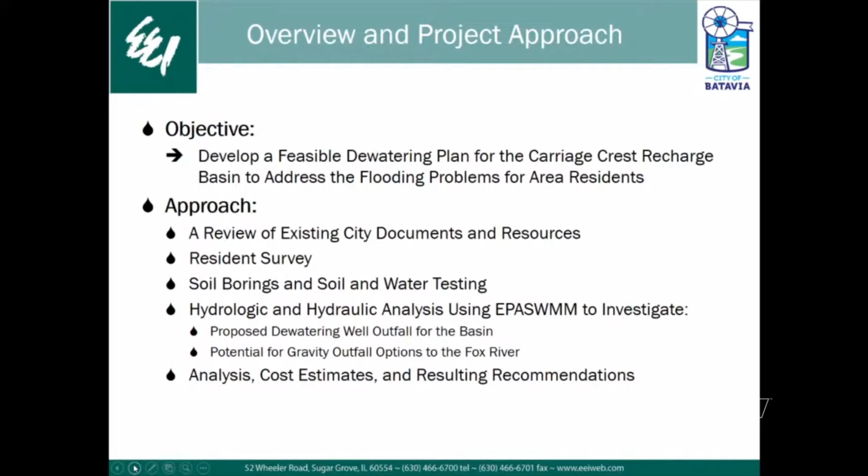So the objective of our study was to develop a feasible dewatering plan for the Carriage Crest recharge basin to address the flooding problems that the area residents are having. To do that, we reviewed existing city documents and resources. We conducted a resident survey, and we did some soil borings and did soil and water testing, and then hydraulic analysis, looking at a dewatering well outfall, and then a potential gravity outfall to the Fox River. And then we did some analysis, estimates, and recommendations.

This is a picture of the storm sewer tributary area to the basin. I'm sure you're all familiar with the area. I don't know if my pointer's quite strong enough, but the basin is in the center there, and the shaded area is the approximate storm sewer tributary area, about 66 acres. So all that storm sewer system collects the runoff during a storm event and takes it to that basin, for which there's no gravity outlet. It's just the inlet pipes.

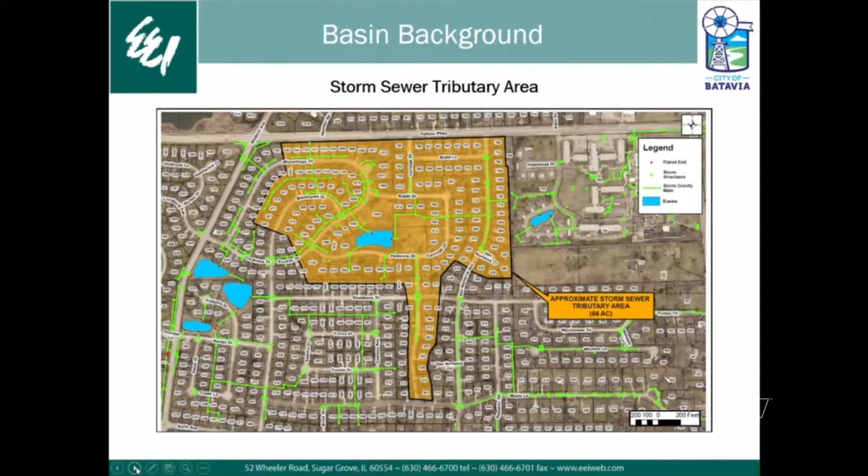A little background on the basin that we learned through the investigation and with the assistance of city staff. There's sand and gravel layers underlying the basin and also within the surrounding soils. The basin was constructed over a former dump site, and there was evidence that there was gravel mining prior to its use as a dump.

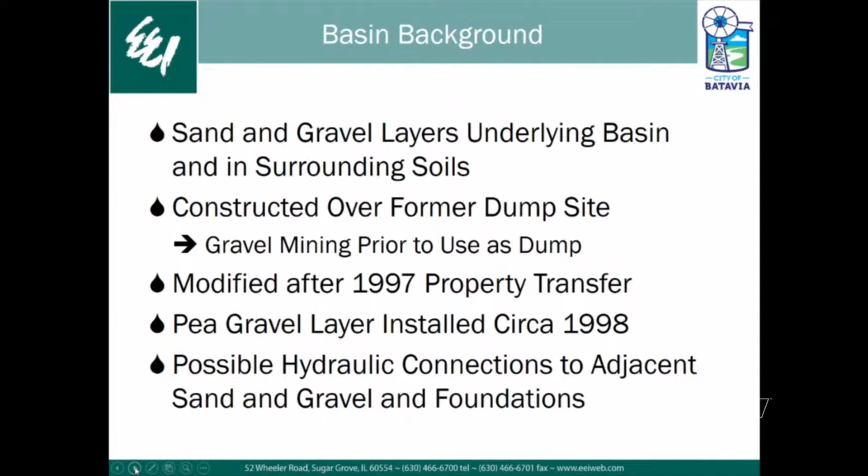The basin was modified after a property transfer in 1997, where an additional lot was added to the subdivision. Then around 1998, after the 1996 storm events, there was a recommendation to add a pea gravel layer just under the surface of the bottom of the basin to try to help promote infiltration. We've also learned there are possible hydraulic connections to the adjacent sand and gravel layers, and possibly also to foundations and basements.

This is a concept sketch of the basin, based on our survey and soil borings. You can see, on my right, the bottom of the basin at about elevation 704. There's a thin layer of topsoil, then that layer of pea gravel, and underneath that is the dump material, and below that is the gravel layer.

We took two borings, one in the bottom of the basin, and in that one there was water. Water in the boring about 2 feet deep, just under the pea gravel layer, which would indicate possible permeability issues with the material underneath the pea gravel, the dump material. In the other boring, just outside the basin where we're looking at a possible lift station location, there was a thinner layer of dump material and then sand and gravel, but there was no water in that boring. So there's a possibility of some perched water table in the basin area.

For reference, from the plans and survey information, there are a few adjacent homes to the basin, and what we think is the lowest basement floor elevation is about the same elevation as the bottom of the basin. So if there is some connection between the pea gravel and the sand and gravel layers, there could also be connection to some of the foundations.

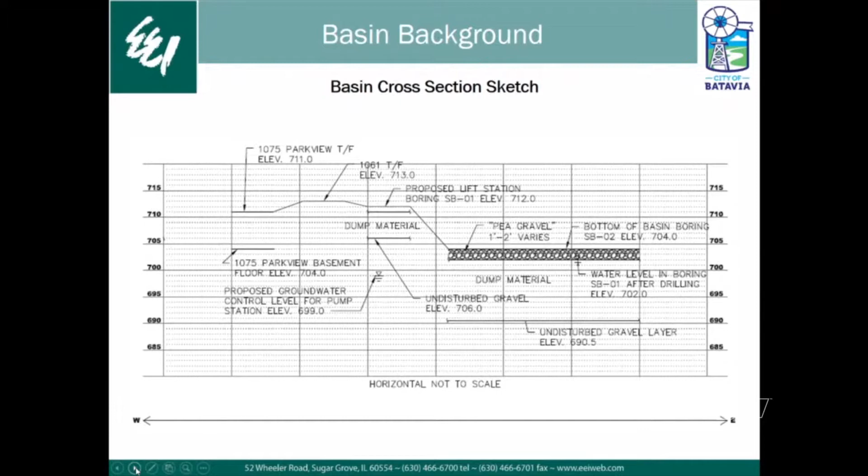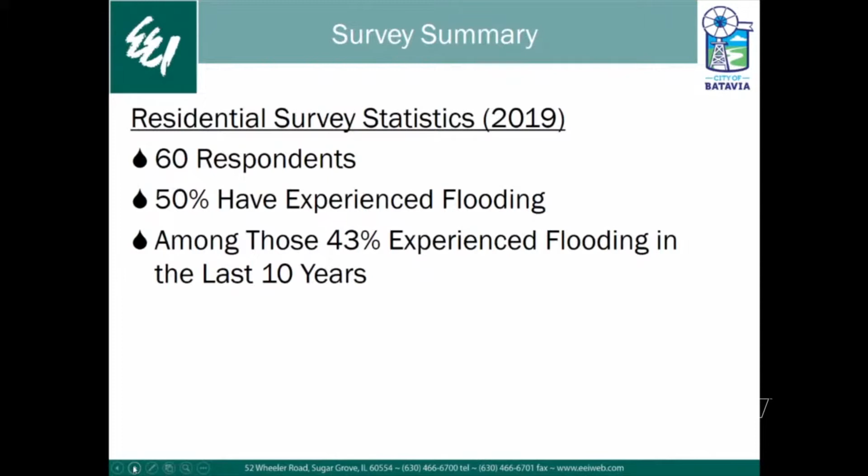The resident survey was done in the fall of 2019. We prepared that, and then city staff distributed it, collected the responses, and got them back to us. We had 60 respondents. About 50% said they had experienced flooding, and of that 50%, 43% said it was in the last 10 years.

This pie chart represents the last 10 years from the survey results. About three-quarters of the respondents had not had a flooding issue in the last 10 years, but just over 20% did, and 15% had flooding issues two or more times in the last 10 years.

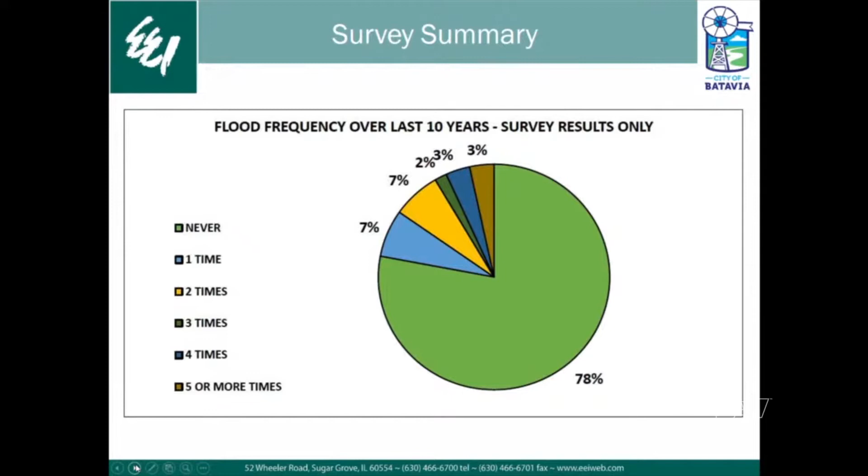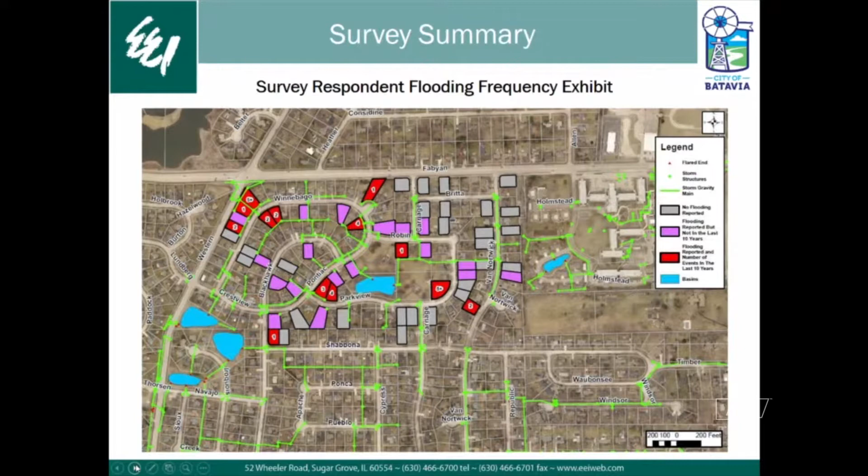This exhibit shows the respondents. All of the shaded lots responded to the survey. The gray shading reported no flooding. The pinkish shading reported flooding, but not in the last 10 years. The red shaded areas reported flooding in the last 10 years, with the number within the lot indicating how many times they reported flooding in those years.

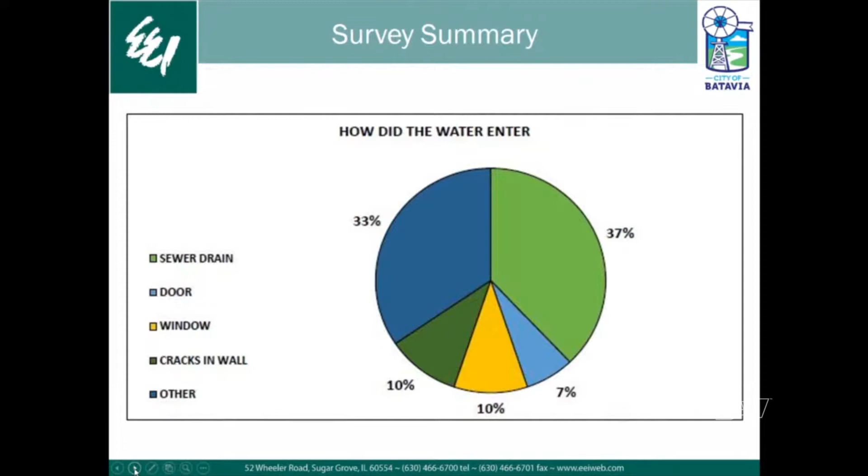Now I'd like to talk about the soil borings we did. We conducted two soil borings, one in the bottom of the basin, in the middle of the basin, and then one where we propose a good location for a lift station if we're pumping storm water.

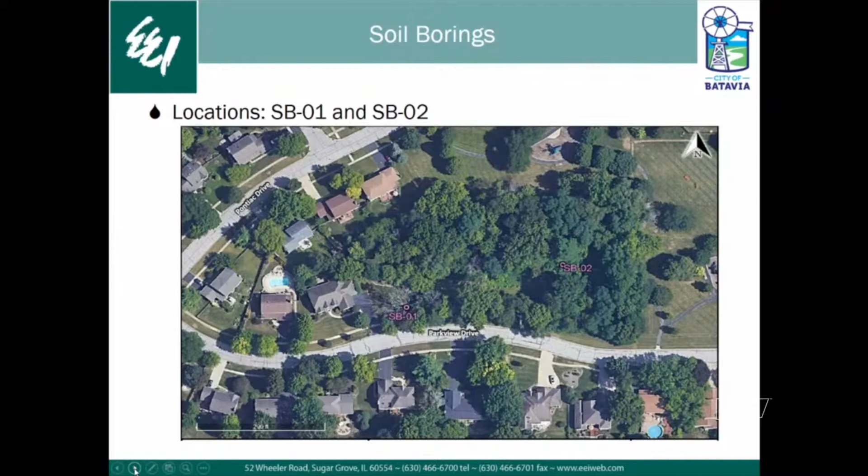The soil boring SB01 was outside of the basin, at the proposed lift station site. Underneath the topsoil, there was about 6 feet of dump material, and then sand and gravel material. The soils report calls that material suitable for a foundation to locate the lift station.

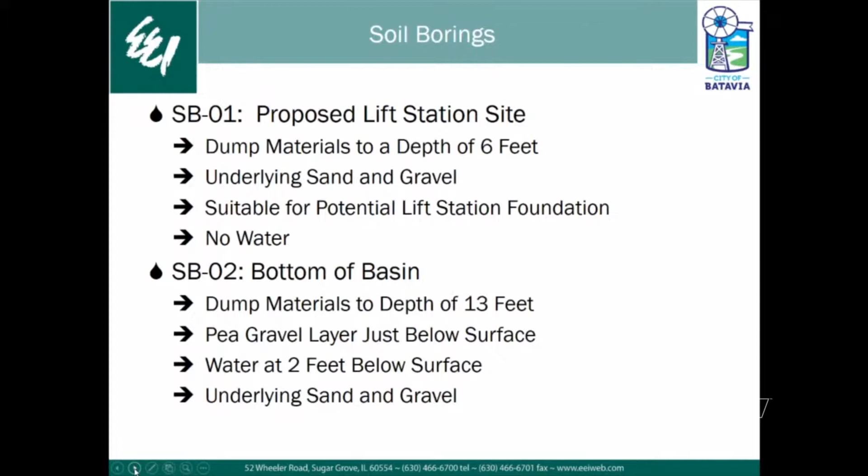There was no water in that boring. Then the second one, in the bottom of the basin, the dump materials there were at a depth of 13 feet, and that pea gravel layer was just below the surface. We had water at 2 feet below the surface in the boring hole, and underlying that was the sand and gravel layer again.

So a few things we gathered from the soil borings and testing: there's a varying thickness of the dump materials, and I think it filled in an excavation or an old ravine. In the middle, it's a much thicker layer, and as you go up the sides and outside of the basin, you have a thinner layer of dump material.

But there is sand and gravel below the entire site and surrounding area, it appears, and the soils there would be suitable if we wanted to construct a pump station. For groundwater issues, we found groundwater in the boring in the middle of the basin, which indicated the possibility of a perched water table within the former dump site.

There's unknown permeability of those soils, but given the fact that the water table at that boring site was at a higher elevation than the bottom of the boring at the lift station site, and there was no water in the lift station boring, gives us reason to believe that water can get through that pea gravel layer and maybe even move laterally, but is not moving through the underlying basin soils at the former dump site as quickly. That's a possible explanation for why groundwater levels respond so quickly to rainfall events.

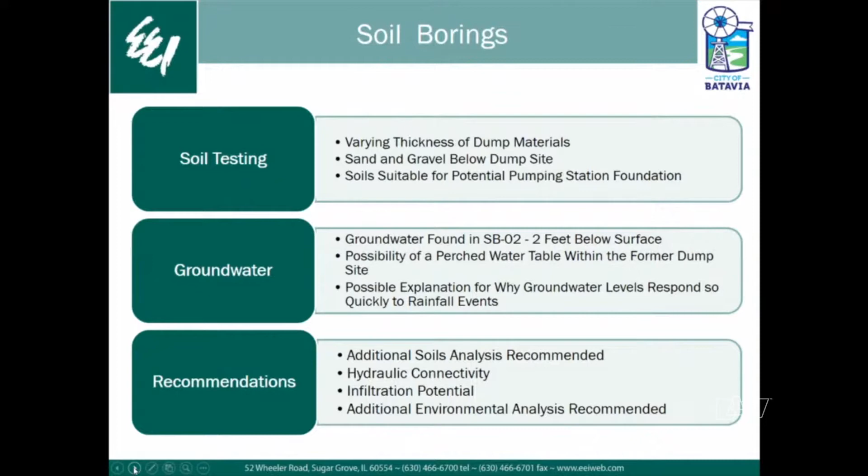So then we conducted a hydrologic and hydraulic analysis. We built an existing condition model from information provided by the city for the storm sewers, from existing plans and record drawings, and then created a storage curve for the detention basin based on information from the city and the 2-foot topography and GIS. We had some common assumptions on land cover for a residential area, confirming that with the aerial photos, percent imperviousness, and the various soil types to try to capture how much infiltration there was in the watershed.

For the rainfall data, we started this in the fall and winter, and we were using the Bulletin 70 information. But in April, the Water Survey released Bulletin 75, their updated rainfall information. So we confirmed our results on some of the model runs that we were using for our lift station analysis with that rainfall data.

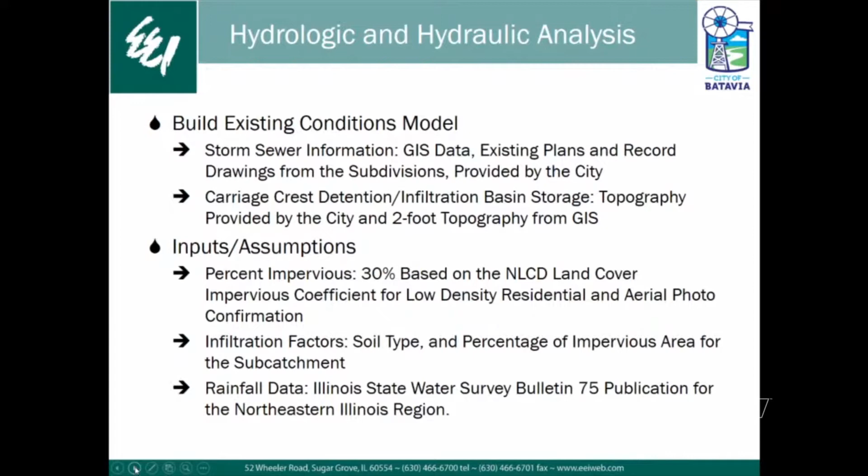So the existing condition model, we broke that watershed into sub-watersheds. It's not a highly detailed model, but it breaks main line sections into sub-watersheds to get the water into the storm sewer and then route that water into the basin. And then from the basin there's no outlet, but we assumed storage underneath the ground level for water and infiltration.

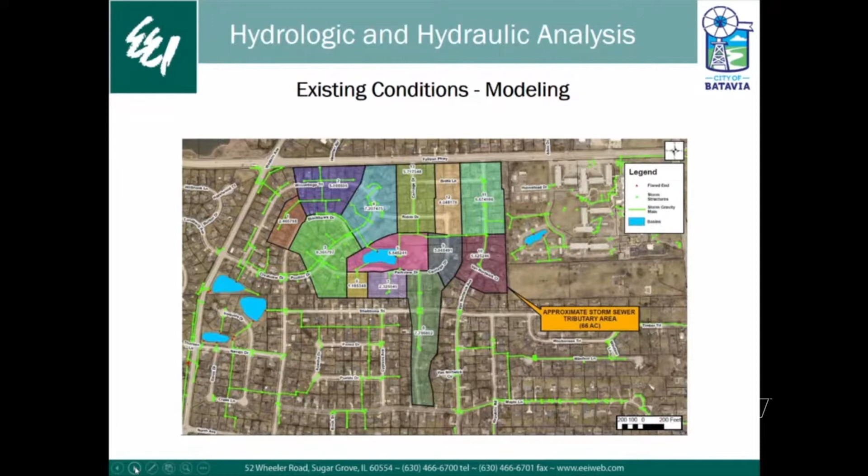We ran a series of design storms from the 2-year to the 100-year, from the 1-hour to the 24-hour, and had a critical duration. The critical duration is the event that produces the highest flow for any return period. So the 6-hour duration was the critical duration.

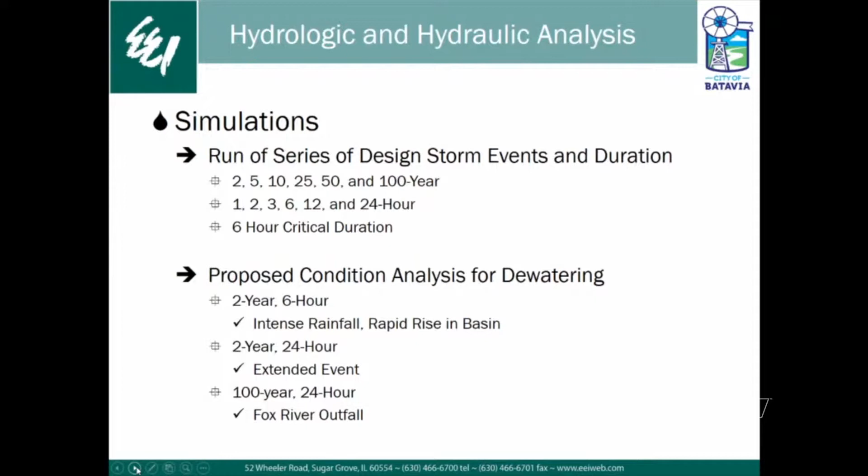So moving forward with our proposed condition analysis, we used that 6-hour event and also the 24-hour event, which is a stormwater industry standard modeling event. The 2-year 6-hour is an intense rainfall where you'd see a rapid rise in the basin, and the 2-year 24-hour is a more extended day-long event with less intense rainfall but a similar volume. We also ran the 100-year 24-hour when we looked at potentially sizing a gravity outfall to the Fox River.

So we set some design parameters for a potential pumping station. We set proposed invert of the drain tiles based on a previous study that estimated the normal groundwater level, and in addition, tried to pump stormwater but not groundwater.

We proposed most of the under drain along the west and north side of the basin that would bring water to the pumping station. That seems to be sort of the direction of groundwater flow in most of the problems, but that would be something worked out in a final design.

And then installation of a drain tile would be connected to the gravel layer to make sure we would get that water to the pump station and not have it move off to the side in the gravel layer.

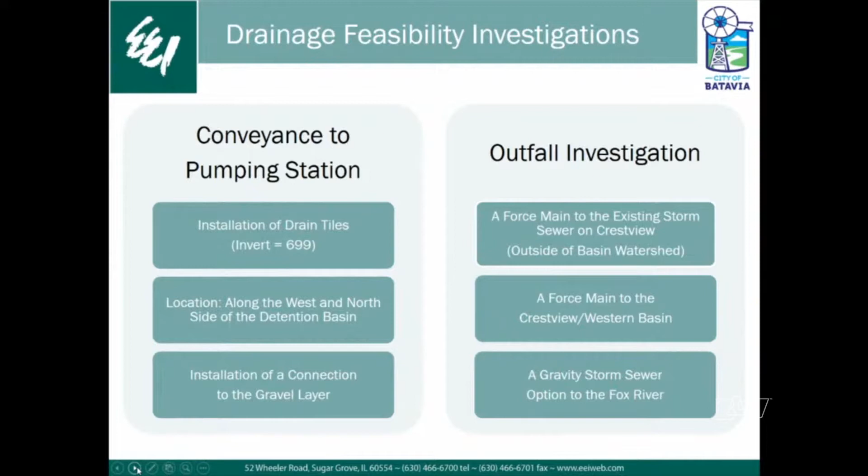For an outfall, we looked at a force main to the existing storm sewer on Crestview outside of the basin watershed, so it's going to a different location and not coming back to this infiltration basin. Another option we looked at is a force main all the way to the basin south of Crestview near Western. And finally, we did look at a gravity storm sewer option to the Fox River.

Our existing conditions, as we've mentioned, is an infiltration-only outlet. The basin level rises quickly, and there's a long drawdown period.

So the first alternate we looked at was a pump station with an outfall to the existing storm sewer. A design consideration was the capacity of the existing storm sewer. We determined to use a capacity of 1.2 CFS, 538 gallons per minute, based on the gravity capacity of that storm sewer.

There will be times when there's usually a delay in the pumping, but there will be times when there's some water contributing from a current rainfall event at the time the pumps would start pumping. So we wanted capacity in that storm sewer without restricting flow into it, so we just used the gravity outfall capacity of that storm sewer.

And then we're also going to look at time to draw down and level of protection in terms of a storm event, like the 2-year event.

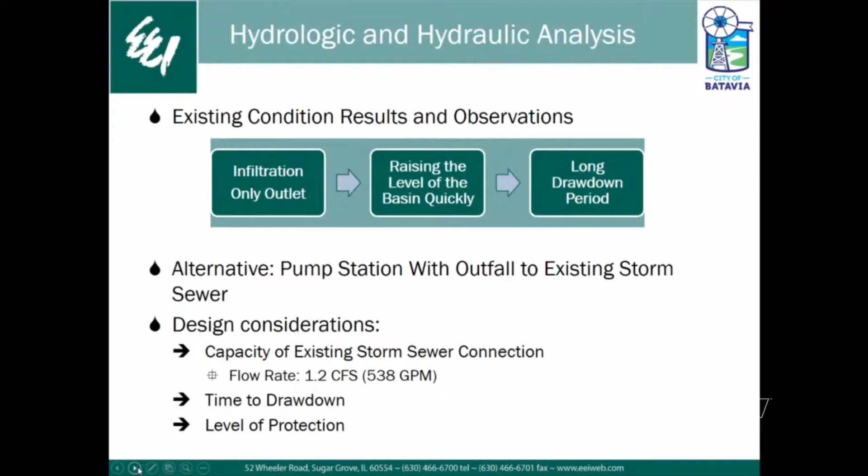So we sized the pump and force main based on that setup, with drain tile inverts at 699, the pumping capacity, and the storm sewer connection, and looked at both a 6 and 8-inch force main. The 6-inch force main had 7.5 to 10 horsepower pumps, and the 8-inch force main had 5 horsepower pumps.

So for the focus of the analysis and the cost estimates, we went with the 8-inch force main, for lower pump velocity, additional capacity, and potentially lower energy usage costs. So that's what our first alternative was: using that 8-inch force main and pump station.

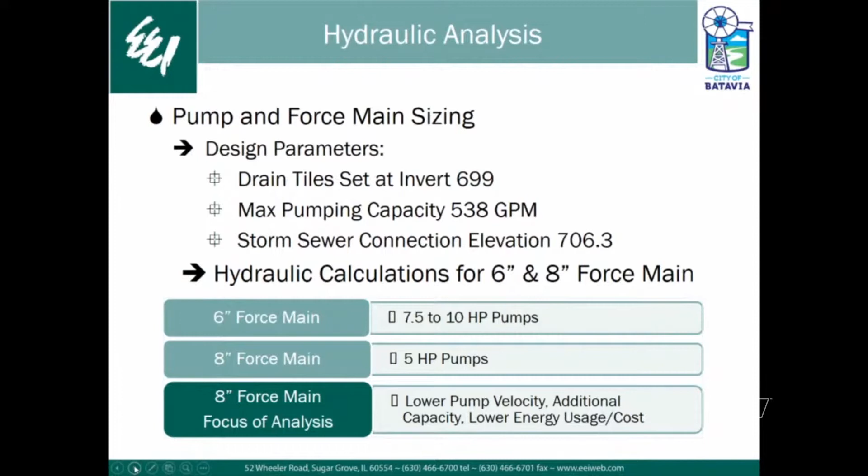The results when we run that with the pumped outlet: you have a slower rise in the level of the basin and a reduced drawdown period, so you're drawing down the basin quicker. In that 2-year, 6-hour event, in the model, the peak elevation was 706.75, which, if you recall that sketch at the beginning, the bottom of the basin is 704. So that's just under 3 feet, 2.75 feet above the basin bottom. The time to draw that down back to the basin bottom of 704 was 22 hours.

The significance of the 704 elevation is that's when water appears on the surface of the basin, and that's roughly the elevation we're estimating the lowest adjacent basement floors are at. So we set that as our level of protection target; we want to keep the water from rising above the 704 elevation. Using that existing storm sewer, we weren't able to provide that, so this is a less-than-2-year level of protection system.

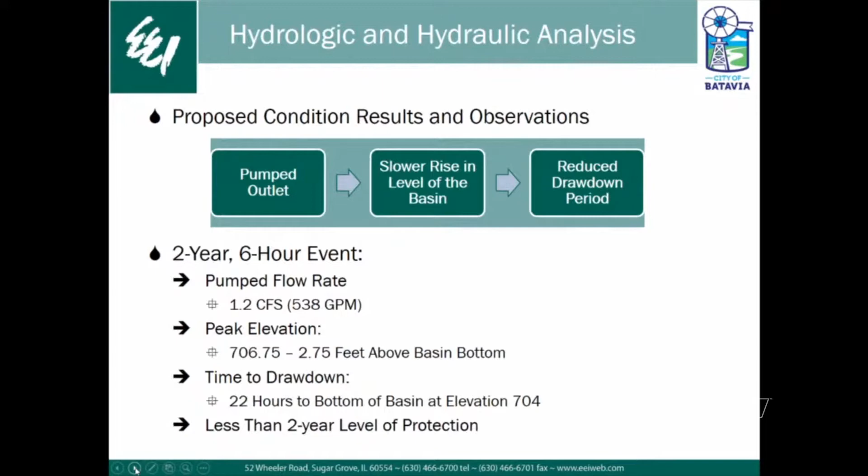So after that, that was our first effort, and then we wanted to look at what it would take to achieve a 2-year level of protection or higher levels of protection.

So we looked at a pump and force main sizing set, instead of at the capacity of the storm sewer, set at getting the 2-year critical duration event to not come up above the bottom of the basin. For that, we needed a pumping capacity of just over 2,100 gallons per minute, and a 14-inch force main with 15 horsepower pumps all the way to that downstream basin.

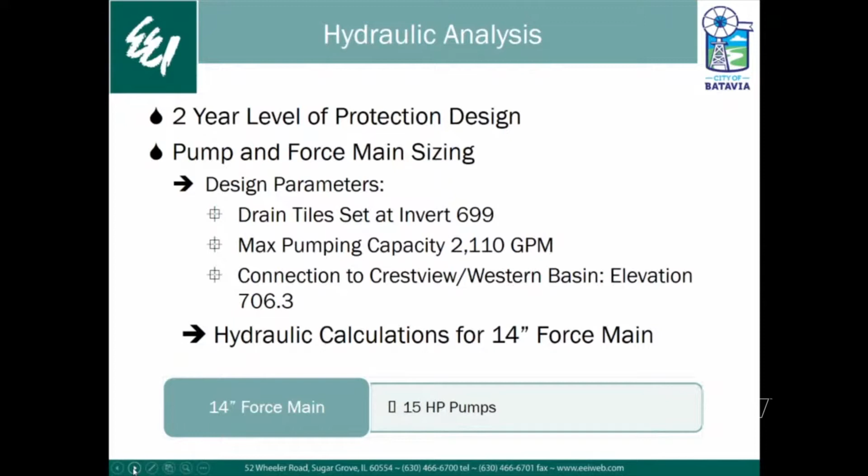And this would give a 2-year level of protection; you have the peak water level at or below the bottom of the basin in the 2-year events.

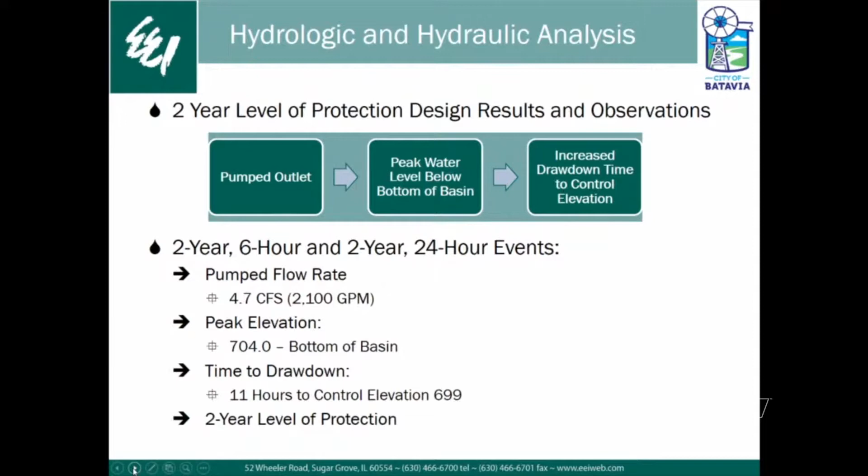Increased drawdown means a quicker drawdown time to the control elevation where we have our drain tile set. At the peak elevation at the bottom of the basin, time to draw down all the way to our groundwater control elevation is 11 hours, and we would achieve a 2-year event level of protection at that 704 bottom-of-basin elevation.

This exhibit shows that same pump station location, but the force main would run all the way down Crestview until it could go into that downstream detention basin. That would be a 14-inch force main.

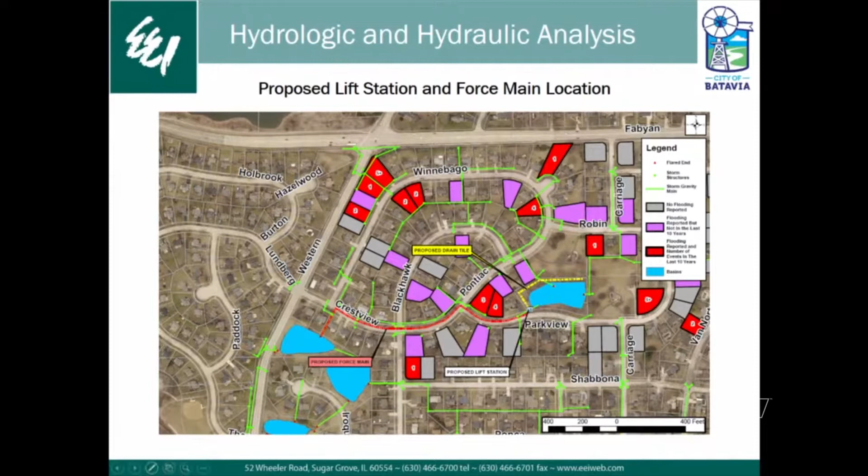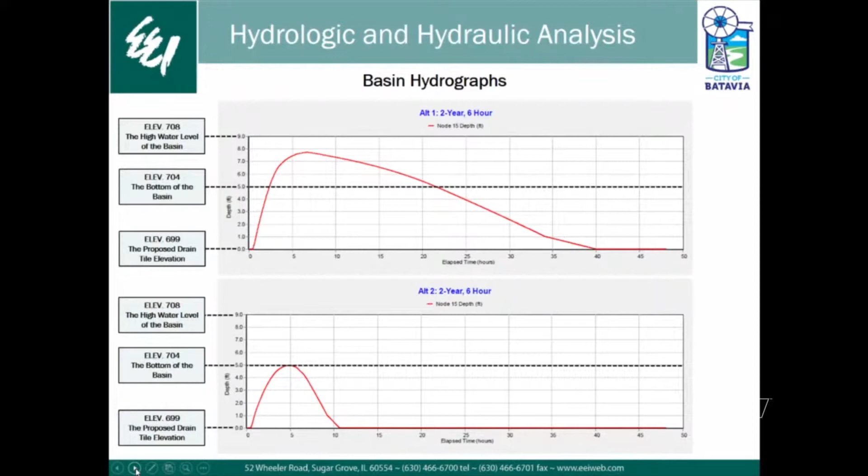We didn't go any farther with the pump station analysis because at the 14-inch force main, we're getting to a practical and feasible limit of what you can accomplish with the stormwater pumping station in this kind of situation. So in discussion with city staff, we thought to look for what possible options exist for a gravity outfall.

That option would be to the Fox River. In this case, we have a design parameter of setting a basin invert down at 700. We'd have to excavate out the basin and line it so we could take advantage of that full 8 feet of storage without overflowing the basin, and construct a storm sewer that would take the 100-year flow to the Fox River.

We would have to line the basin to make sure we're containing the water within it and not allowing it to move laterally into the sand and gravel layers adjacent, because you wouldn't want that kind of investment and then not being sure that your water would stay contained where you want it to be heading.

Unfortunately, looking at the existing storm sewers downstream, the elevations wouldn't allow us to connect to any of them. There's the possibility of running parallel to the existing storm sewer downstream, or combining with it. So it would be 24-inch and 48-inch storm sewer sizing in the model for a concept design.

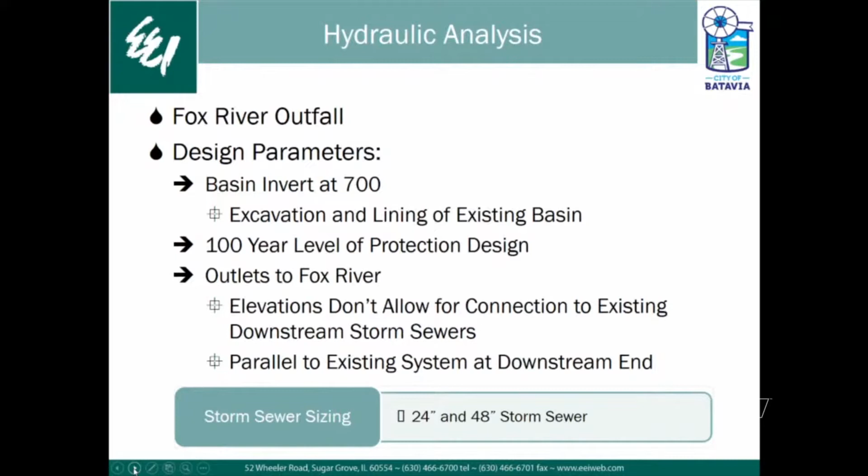So with the gravity outlet, we can contain the 100-year event within the basin, and with the excavation and lining of the basin, it would remove the possible connection to sand and gravel layers.

You'd have a peak release of 15.93, top elevation of 708, and that's when the basin is basically completely full. If you're familiar with the east end, there's a walkway or a little bridge over a culvert, so it'll be right up to that level—about 708 at the top of the basin.

The time to draw down would be 27 hours, and that would provide a 100-year event level of protection.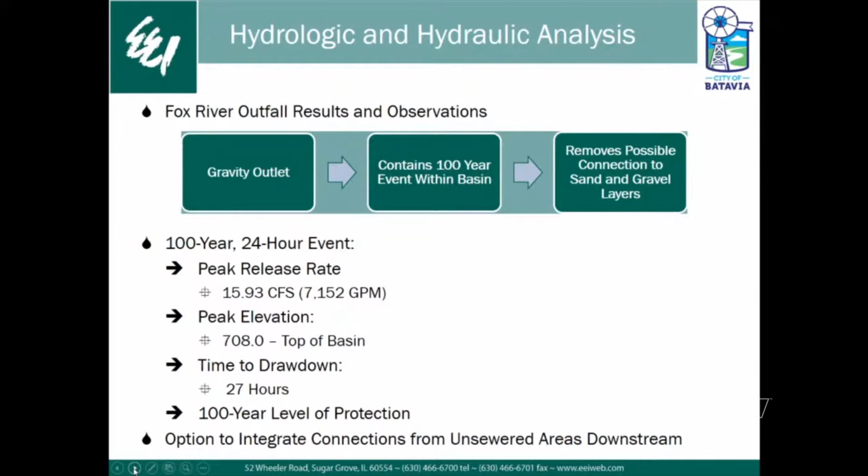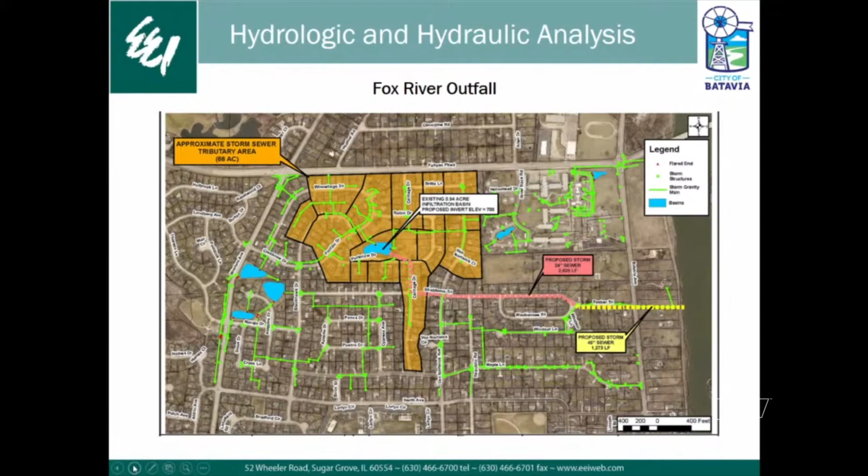There'd also be the option to integrate connections into some downstream areas that don't have storm sewers, as you can see possibly on this exhibit. So we'd have the gravity outfall as a 24-inch storm sewer, and along Chavanaugh, where there are no storm sewers, you could provide some drainage benefits to that area, then connect to a large storm sewer. You could either run a parallel line or a combined new line down to the Fox River, providing your gravity outlet and your 100-year design protection.

Just to briefly do some comparison: the existing, modeled 2-year elevation has the basin full. This is without pumping—I know in the existing condition, the city has some temporary portable pumping they do when there's water in the basin.

With the pumping station to the existing storm sewer, we limit that and improve the drawdown time. With the pumping station to the downstream basin, we can get a 2-year level of protection, estimated based on the model, with the water not coming up above the ground. With the Fox River outfall, we evaluated the 2-year and the 100-year 24-hour events. For the 100-year event, you'd have the basin full and the water releasing to the storm sewer, or to the river through the storm sewer.

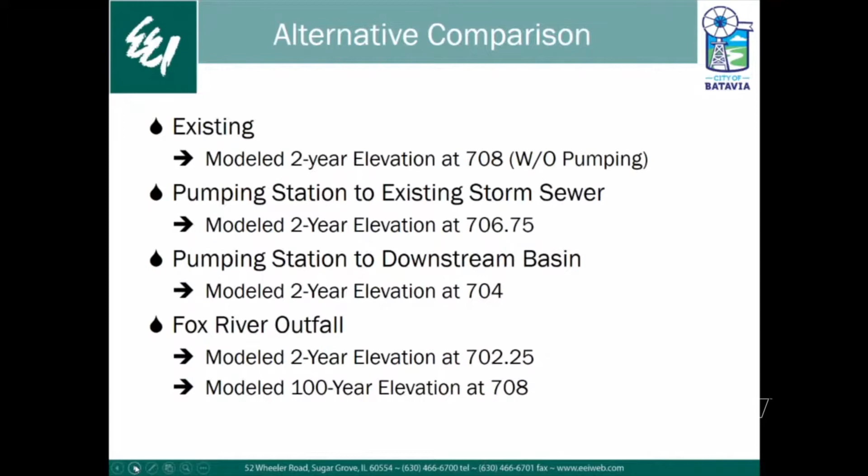But I did want to share this with you, an exhibit of potential flooding depths.

So in the basin, there are some areas on the topo a little below 704. The yellow areas are those areas. The green areas are the area between 704 and 706, so that's when you have 2 feet of water in the bottom of the basin. You see the basin footprint is full.

And then there are some low areas in the park that might start to show ponding water. By the time you get the basin full at 708, the red area is elevations between 706 and 708. So by the time the basin is full, you'll have potentially ponding water throughout the park site, in some rear yards, and in the roadway from the surcharging of the storm sewer.

So you would still have that happening even with the gravity outfall, but it would be for a very short period of time during only the very largest events. Whereas currently, the 2-foot topo doesn't always pick up the lowest spots. There'll be inlets in these rear yards that may be a little lower than the topo is suggesting.

So that's why when you get a couple of feet of water in the basin, people start to see water coming up in the backyards, and you start to see the streets not being able to drain because of the surcharging impact of the nature of the way the basin is set up as the water level goes up relative to the elevations of the storm sewers.

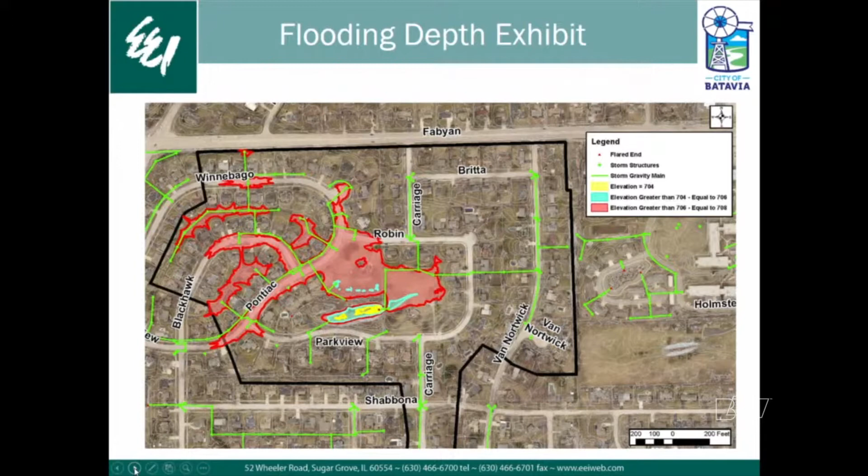So this is a summary table with our concept cost estimates. The lift station force main to the existing storm sewer with the less than 2-year event, our concept estimate for that is $604,500. With the larger force main all the way to Crestview with the 2-year event protection, the concept estimate is $879,000. And then the estimate for the outfall storm sewer to the Fox River is just over $3 million.

That would include excavation and lining of the basin and construction of the storm sewer.

Tim, yes, this is Andrea. Can you just clarify these costs as to whether or not the design engineering and construction engineering are included in those numbers or not, so everyone is aware?

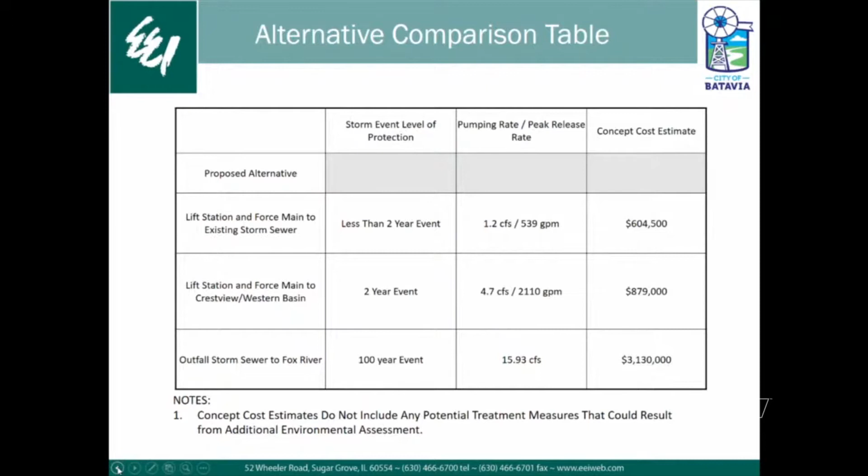Yes, that includes the design and construction engineering, and I believe it's a 10% contingency on the cost estimates.

So I just wanted to, for reference, look at the May 2020 event, which we're all familiar with, because that event happened as we were just wrapping things up, but it made a lot of things make sense with what we were seeing with the soils, and we did some rework based on that. I think we learned quite a bit about how things function or potentially function with that event. So this is observations at the official records at O'Hare for those 2 days, May 14th and 17th, over 3 inches of rainfall.

They're both very close to a 2-year, 24-hour rainfall event, which is 3.34 inches in the new Bulletin 75 State Water Survey publication. And that 5-day period at 8.2 inches was a 25-year, 120-hour event, almost exactly a 25-year event.

So in that case, just looking at the way the basin was modeled, this would estimate that with the spacing between the two events, our drawdown time of 11 hours on a 2-year, 24-hour event, a 2-year, 6-hour event — we were estimating that that alternative, the 2-year protection pumping alternative, could have kept the water levels below the bottom of the basin for that series of events in May.

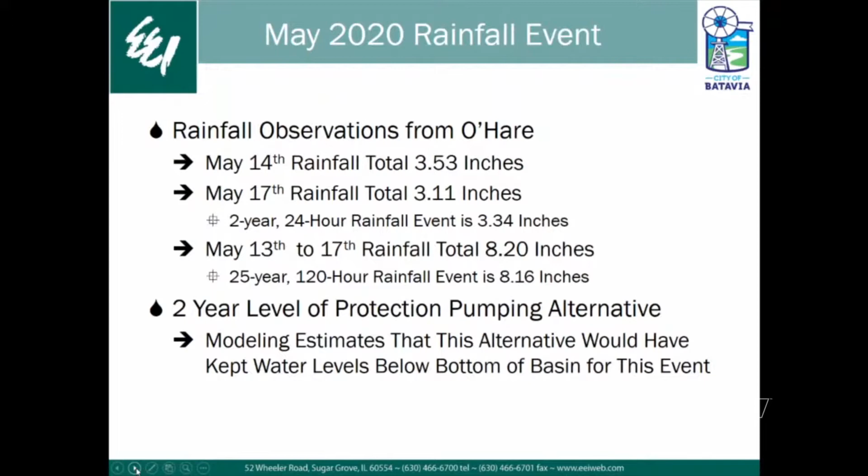There are also some possible other mitigation options to consider, either in conjunction with the pump station or standalone. Some residents' sump pumps discharge directly back into the basin, and it's possible to find a way to reroute those to prevent that from recirculating.

Possibly a force main system that would allow connections so that the sump pumps that are pumping water could tie into the force main as well as the city's pump, instead of having residents pumping water into the basin to be pumped by the city's pump to the force main. So that's a possible option to look at if design moves forward with the pumping station.

And then other options would be to look at a possible liner or cutoff wall across that gravel seam or another connection, specifically along the west side of the basin, if that's determined to be a significant factor, with additional investigation.

Another idea would be to look at increasing the infiltration capacity of the basin, possibly with dry wells or other connections of that pea gravel layer into the underlying soils to help it move down instead of laterally.

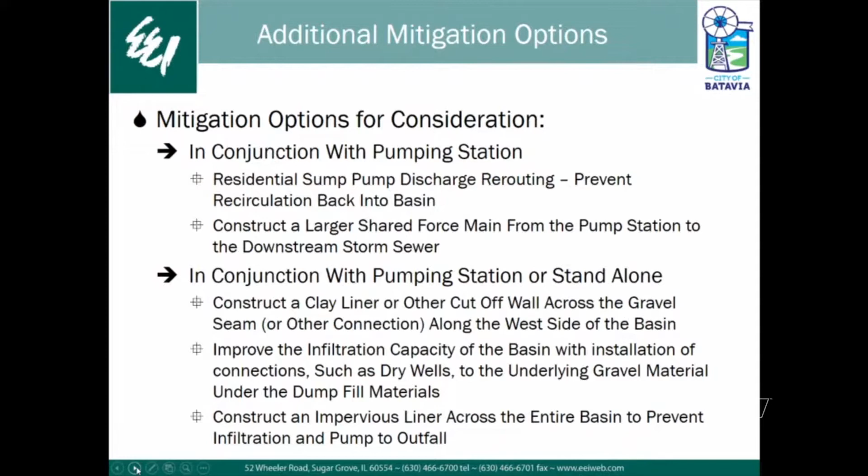So in conclusion, we studied the Fox River outfall: significantly more expensive than pumping, but it would be more effective and reliable in the most severe storm events. And additional mitigation measures should be considered no matter what goes forward, because even with the pumping scenario, you're going to want to look at those hydraulic connections that may exist to the surrounding groundwater table, and potentially then to some of the basements.

And recommendations then would be to do a comprehensive analysis of the soil and groundwater conditions to get a better understanding of the recharge characteristics and infiltration capacities of the basin, how they could be amplified if possible, and then to identify connections to the sand and gravel layer and foundations so that they can be effectively designed to cut off those connections.

And then a full environmental assessment so you know what kind of permitting issues there might be with pumping stormwater from the dump site. And then once you have that, you can do a more detailed assessment of the costs and level of protection for any of the permanent mitigation options versus the current option of the portable temporary pumping, and you could

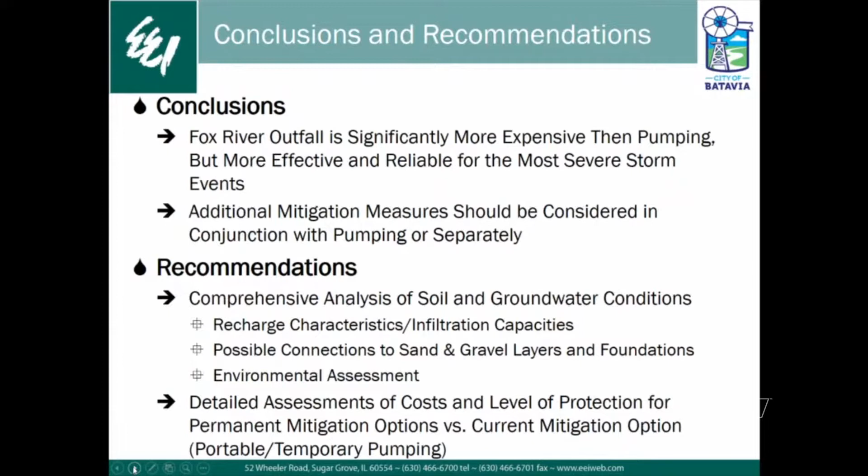have better confidence going forward with one of the design options that you have eliminated the possibility of the connections, so that once the solution is implemented, you'd have better confidence in that, and you have a better ability to compare the costs once you know all those connections and what it would take to eliminate those. And with that, I'm open to questions.

Your Honor, can you use the mic, please? Oh, it'd be a residential use, but it would be adjacent to that pipe. So I just wonder, would it be easy to drop that sewer from that area into that pipe? It wouldn't be impacting these folks because it would be to the east of where they are. That's not something that we looked at. We just modeled the sizing for the outfall out of the basin, but that's something that could be looked at. It might impact slightly the size of the storm sewer required.

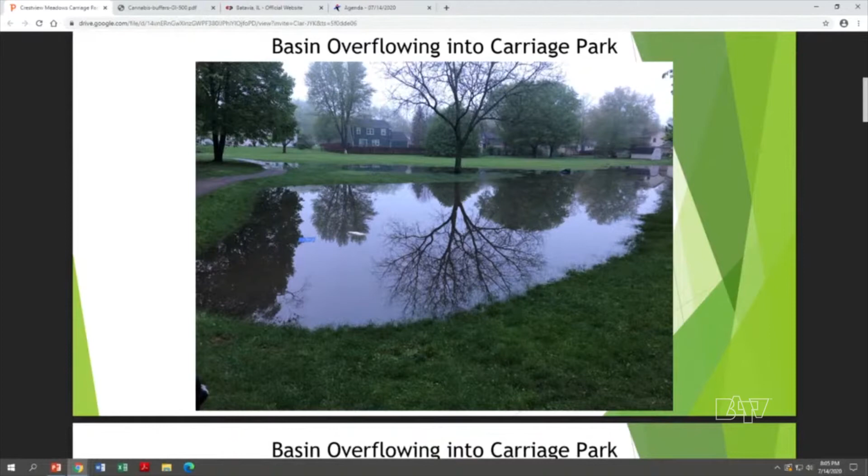What's really concerning about this, the next couple of slides, is we've got a basin that fills up, overflows into a park, and it's built over an old dump. So, stormwater by nature is contaminated. So all that water then goes into the grassy area. If you go to the next slide, it reaches out with multiple fingers out into different areas. And if you go to the next slide, it sits also right in the playground area.

So as a resident with small children, 10 and 8, I can tell you my kids love this park. They love the woods where the basin is at, but we've had a lot of questions, and we've changed the criteria for what they're allowed to do now because of the dynamics of that park. And obviously we also keep them away when the water's at this level, but as PJ mentioned, this is every year now. Last year it happened a couple times.

This year we're fortunate. It hasn't happened as many, but the magnitude of this recent event certainly hit home and allowed for these pictures to be taken. So, this is what we're living through in our park. Dogs, kids, adults, we enjoy it, really love it, but under these circumstances we can't even go near it.

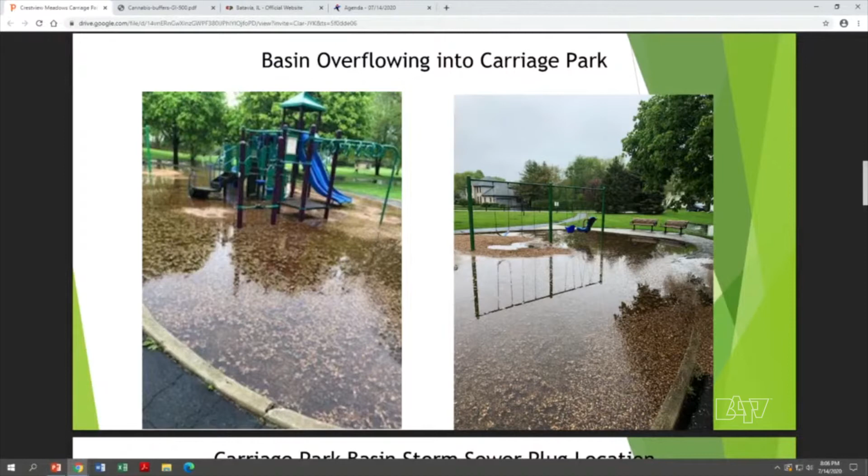So next, please. The plug was brought up by EEI, and I appreciate that, Tim. The plug is an interesting concept because in most counties, you're not allowed to plug a sewer line. I know for a fact in DuPage, the guidelines specifically say you cannot restrict the flow to zero. We all understand that it has to be done to protect us from the marsh, and the green box is roughly where that plug goes typically, so that the marsh and anything west of us doesn't back up like it did in 96. So we accept that, and then we all flow into the basin.

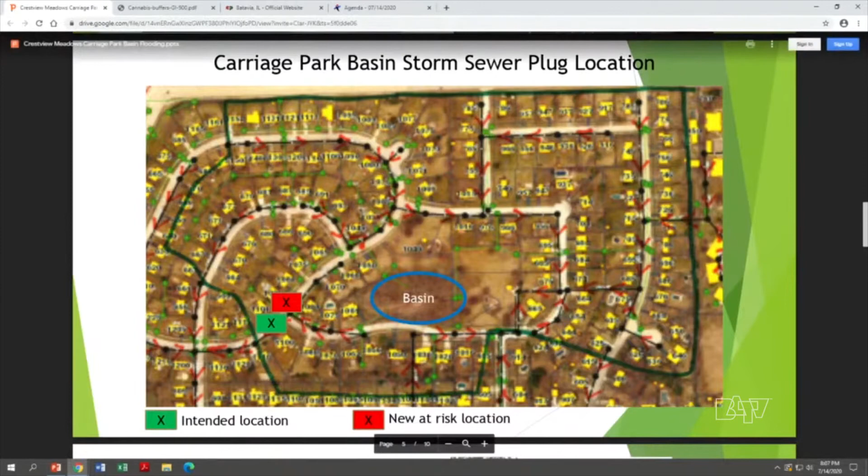But what happens is when the basin's full and the city has to come out and pump to help PJ out and others, they move that plug. So this past May for that 5-day event, 25-year, whatever it was, that plug was never in its intended location. So as a resident concerned about the marsh backing up, concerned about our basin filling up, we didn't even have the plug in the right spot. Now, you'll see over the next slide, when the plug is moved to allow the city to pump, which we understand why they need to, this is what we lived through at that intersection.

So the entire intersection's full. It's reaching up into the parkway. Our backyards are full. This is the mess we're dealing with when our basin fills, along with the park being filled and properties taking on water. There's many here that represent, once again, the water issue. So our properties are forced to hold the water. Our sump pump systems are pushed to their capacity. They're either going off continuously or at very high rates.

I can tell you mine was going off 3 to 4 times a minute, which equates to over 4,000 cycles per day for almost a week. The stress, the anxiety, what we live with under those circumstances, I can tell you I don't sleep good. Many here are actually taking on water. But I've heard it too many times where individuals have said, well, your pump's running, it's fine. Okay, but under that condition, it could fail at any time.

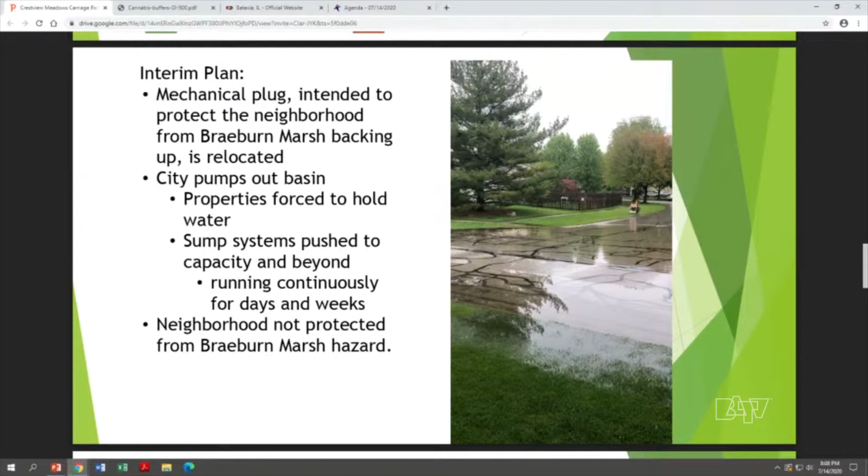Even with a battery backup, you might have 8, 10, 12 hours of battery backup. Under those circumstances, if the power went out, you've got maybe 4, maybe 3. Unless you go with that house generator, there aren't backup systems out there that can support what we're experiencing for a lengthy period of time. We really need help. So if you want to go ahead and go next.

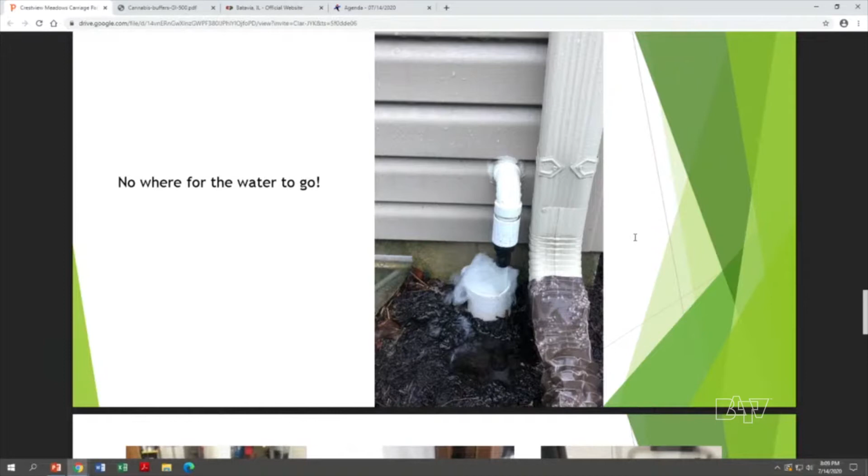There's a picture recently; the water's got nowhere to go. It doesn't go down into the storm sewer system, the groundwater system. It just bubbles right up, it goes right back down to your foundation. And we're all living through that at a minimum, or we're taking on water.

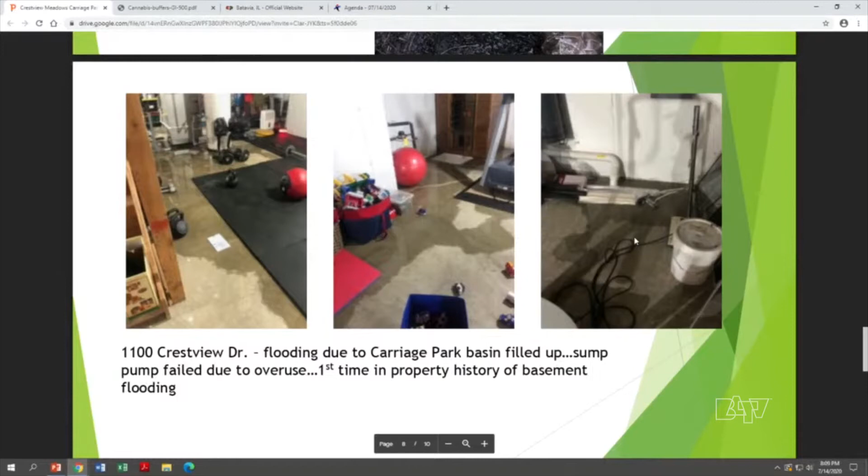Next, please. This is my neighbor just across the street, the Browns, 1100 Crestview Drive. Through all the discussions, everybody who's lived in that house has never taken on water. Well, under these circumstances, with the pumping, the flooding, along with the basin fill, their pump failed during this episode and took on water for the first time. Next slide.

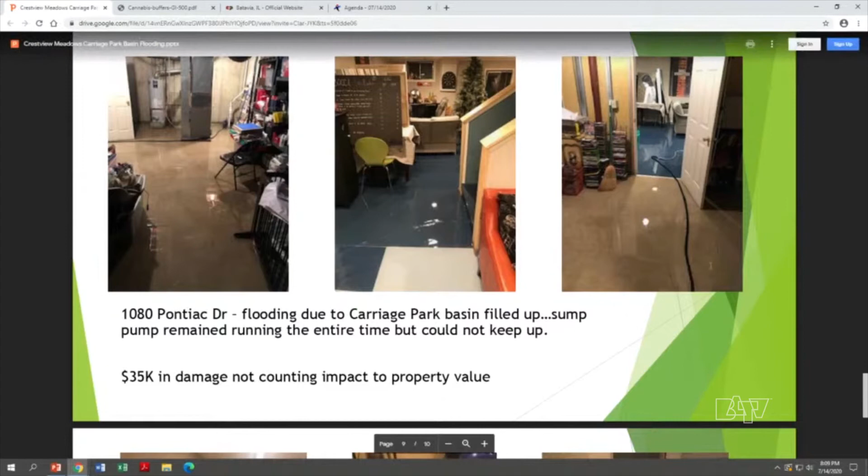Once again, neighbors, 1080 Pontiac Drive, they live right next to PJ. Cruises, right back there. The honor of also speaking for them here, but once again, with their pumps running, they're taking on water. They've got systems in place, they've got contingencies and backups there, they're still taking on water. As PJ said, the next slide, he's got multiple systems. He still can't keep up.

So pumps running, you're living on the edge. In some cases, pumps running, you're still taking on water. We really desperately need your help, and we thank you again for listening to us tonight. Thank you.

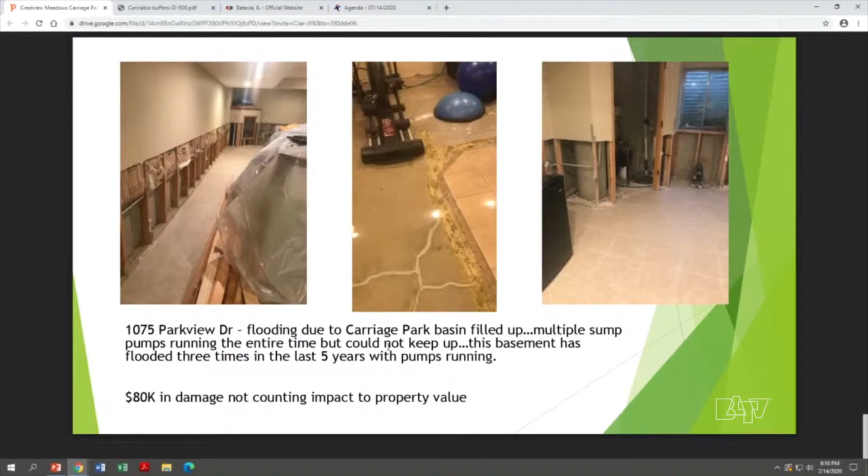I guess just to close out our presentation tonight, unless there is anybody with any comments, again, I do want to thank Jason. Obviously Dan and Elliot have been good. I did want to mention Gary who's on the line, and Andrea and Rahat are here, and Scott Haynes and Bill Kellum. Your staff has been great people to work with throughout this whole process, going back to 2008. They're out there, they're on the front lines, they're listening, and so we really appreciate all their efforts to date.

So to repeat our final ask, we would ask that we restore the next phases, whether it's more soil borings and getting to final design that can move forward this year once they wrap this study up, as well as, you're getting ready to start deliberating for the 2021 budget, trying to figure out a way to get some construction money into the 2021 budget so that we can get this thing built, put in place a sustainable solution, the protection that the boys from EDI are talking about, and that those sleepless nights that Jason is talking about go away.

We thank you for your time. If there's any questions you all had before I turn it over, I'm here and willing to answer any questions as well. Thank you.

My name is Jeff Kruger. I've been here since 1988. I live at 686 Blackhawk, so I've experienced this for as long as anybody here. And just to reinforce, which is very well said by both gentlemen, I've got 2 pumps in my main sump pit. One is rated at over 4,000 gallons per hour. It runs nonstop. There is no backup system, no battery backup system, no whole house backup system that can save that.

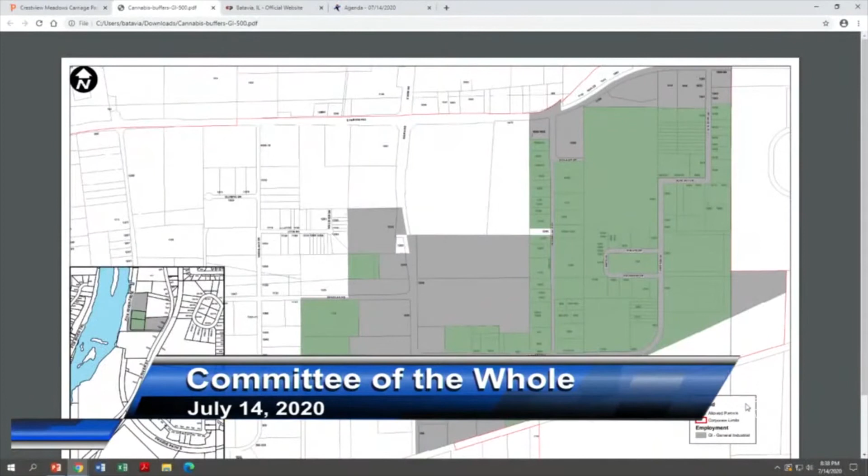They went through and had their meeting and came back with several recommendations. Drew outlined that this draft ordinance would amend the employment districts chapter to categorize several uses implemented by state licensing acts for recreational cannabis—industrial business-related uses involving creating and shipping cannabis products. The Planning Commission recommended that these uses, if permitted by the city, be conditional uses only in the general industrial district, with additional standards for locational requirements that businesses would have to follow.

In terms of location requirements, what was proposed is a 500-foot setback from certain uses, including public and private schools, daycare facilities, public parks, churches, cemeteries, residentially zoned property, and also residentially used properties that may not be zoned residential.

They also established a number of performance standards. The first regulates odor, requiring that no odor be detected from these uses at the property line. The second is an industrial noise standard, where the Planning Commission proposed that these businesses follow the noise standard already in place for industrial-to-residential uses.

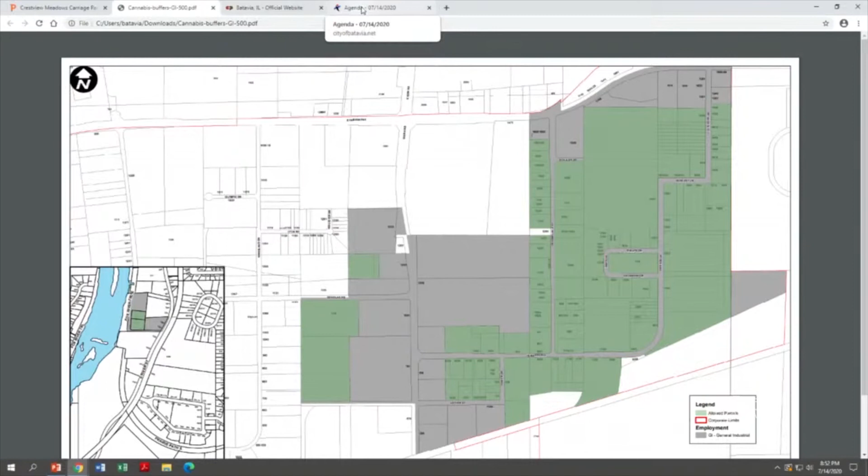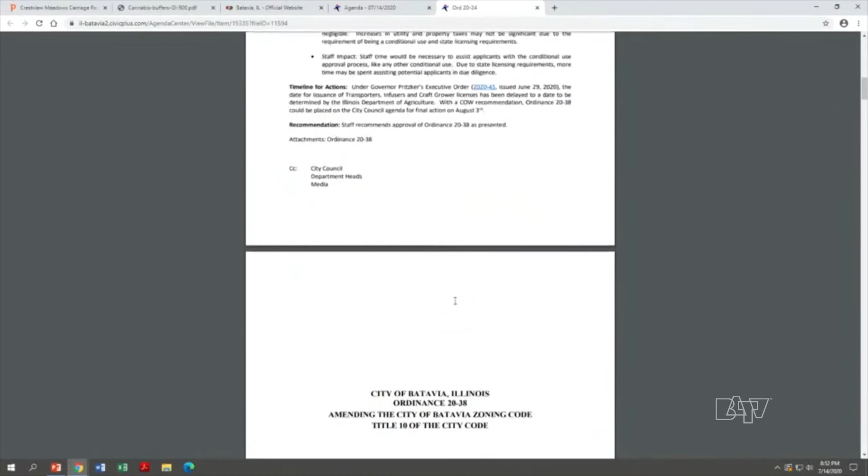It's all manufacturing, it's basically just for a different end use. I don't know why we're treating it different, Drew. I don't think we should, and that's why I think we should remove that restriction and go by what the state statute says as far as how far it has to be away from residential, and not over and above what we've decided for the commercial district that fits in the industrial district.

Yeah, I think we should mirror the medical with deference to whatever the state law says. Sounds good. So, Scott, can we change that and move it? You can do whatever you want, it's up to you guys as to what restrictions you want to have or not.

So I don't want to hijack you here, Marty, but I think that would be an amendment I'd like to see made to the approval of this tonight to move it to council. The other thing is, we're kind of waiting on what the governor is going to decide on that. We also have a referendum out there to decide other uses for cannabis in our city.

I think this is something we need to get completed, so that when the governor, or the legislature, whoever makes that decision at the state level, moves forward, people will be able to look at our properties available for this use and not be trying to do it after the fact.